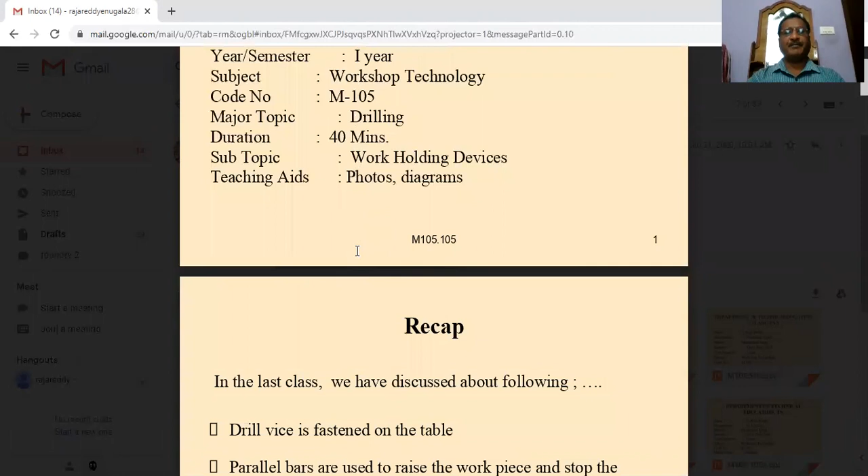Recap. In the last class, we discussed the following: the drill vise is fastened on the table. Parallel bars are used to raise the workpiece and stop damaging the vise and machine table. Step blocks are used to support the other end of the clamps.

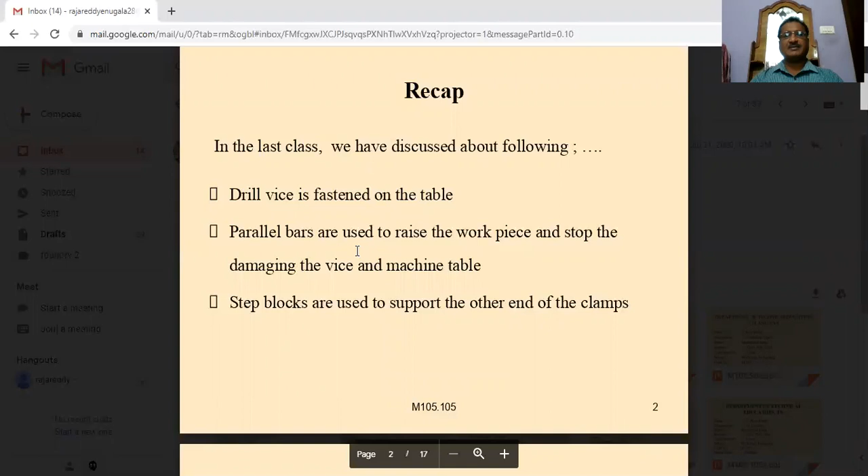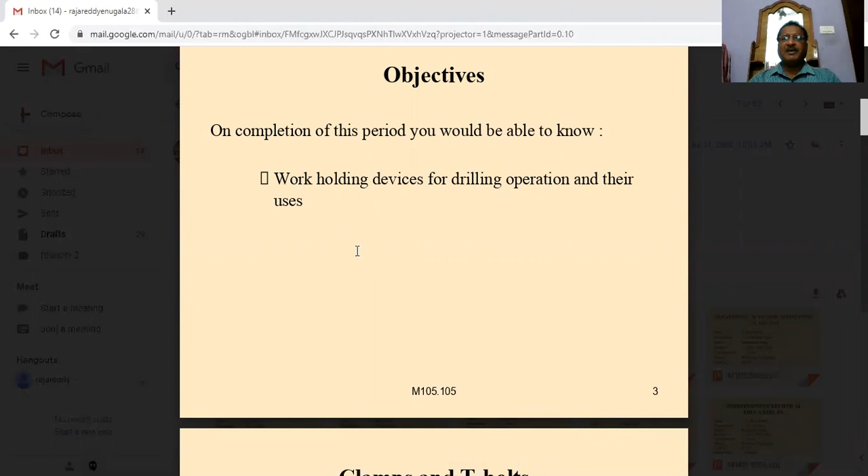Objectives. On completion of this period, you would be able to know the work holding devices for drilling operations and their uses.

Clamps and T-bolts are used to clamp the work to the table and avoid inaccuracy of work and accidents. It should be arranged to grip near the drilling point. The free end of each clamp should be clamped.

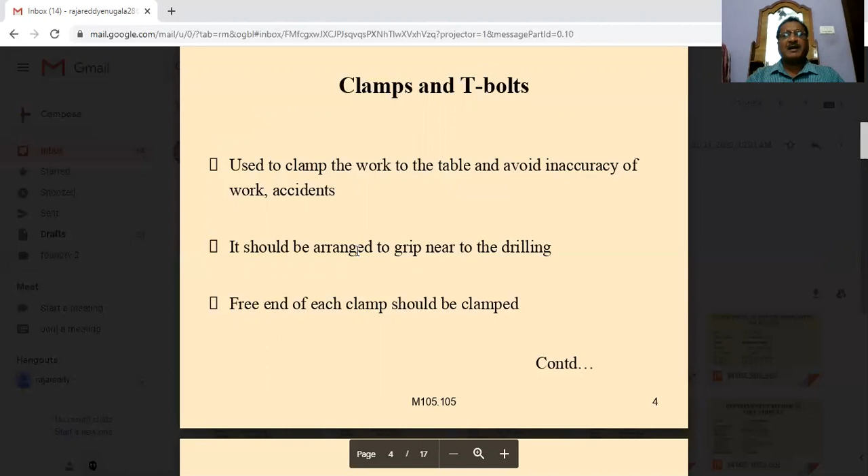Clamps and T-bolts. This schematic diagram represents clamps and T-bolts, which is one of the work holding devices. The machine table has slots, and in those slots, we could insert the T-bolts over the drilling machine table. The step blocks are placed as shown in the figure.

The work will be placed in the exact position over the parallel bars, and over the step and the work, a clamp is placed by inserting the hole on the clamp to the bolts on either side, and with the help of the nut, by placing a washer and nut, the bolt will be fixed.

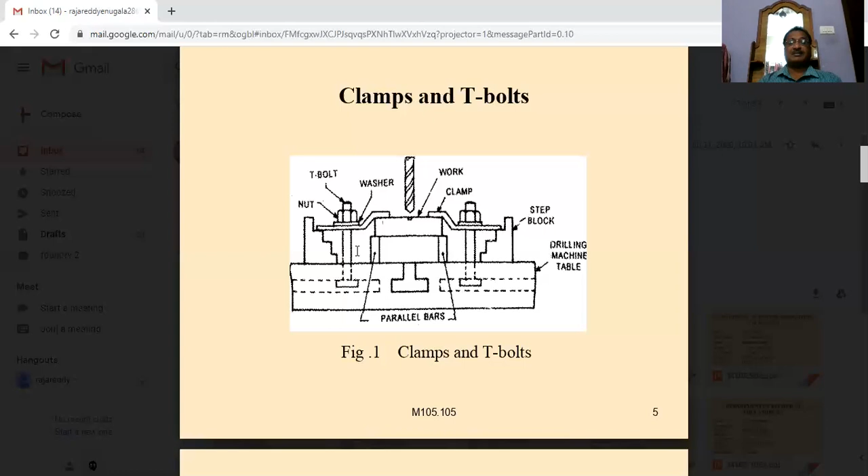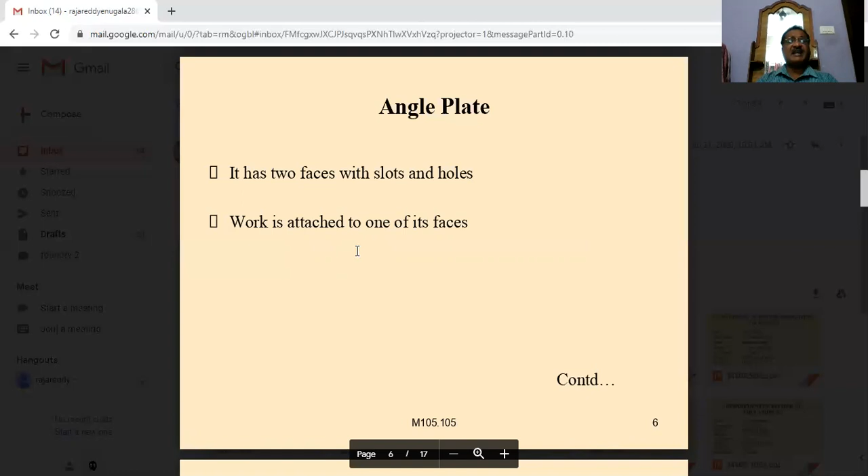Next is the angle plate. It has two faces with slots and holes. Work is attached to one of its faces. This schematic diagram represents the angle plate, which is exactly a right angle with a central hole.

The rectangular workpiece will be placed on one of the rectangular faces, at the center hole, inserting the bolt and nut. It is fit tightly, keeping the workpiece where the hole is to be made underneath the drill bit, at the marked and spotted area.

The drill bit is then placed over the mark and drilling is done. The drill comes out the other end of the workpiece without disturbing other components. Hence, this angle plate is used to clamp asymmetrical workpieces.

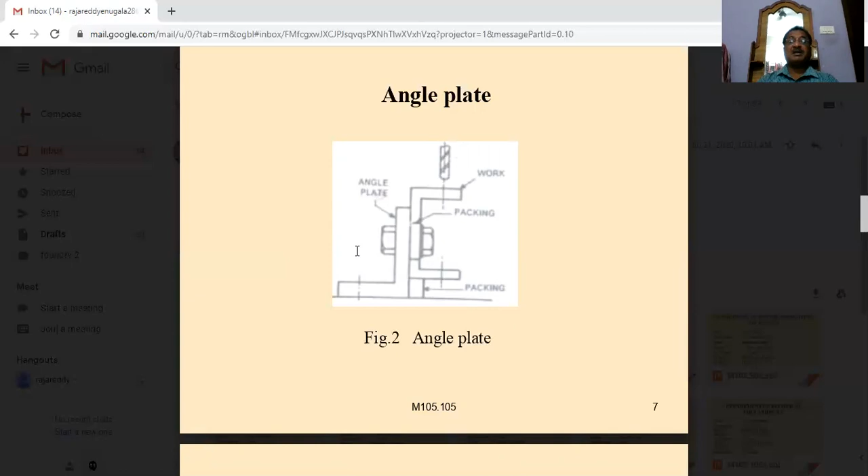This round bar normally cannot be held rigidly in the vise. The vise can hold workpieces that are flat, rectangular or square in cross-section, but not round. Round bars can be held rigidly by using V-blocks, U-clamps and bolts.

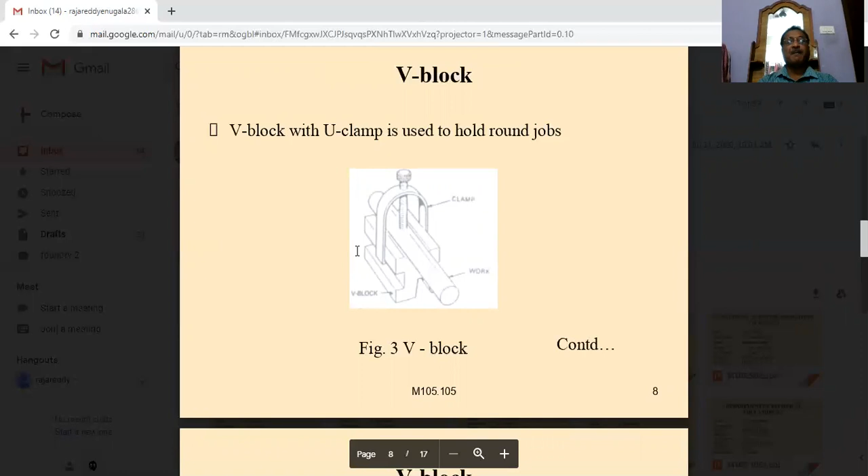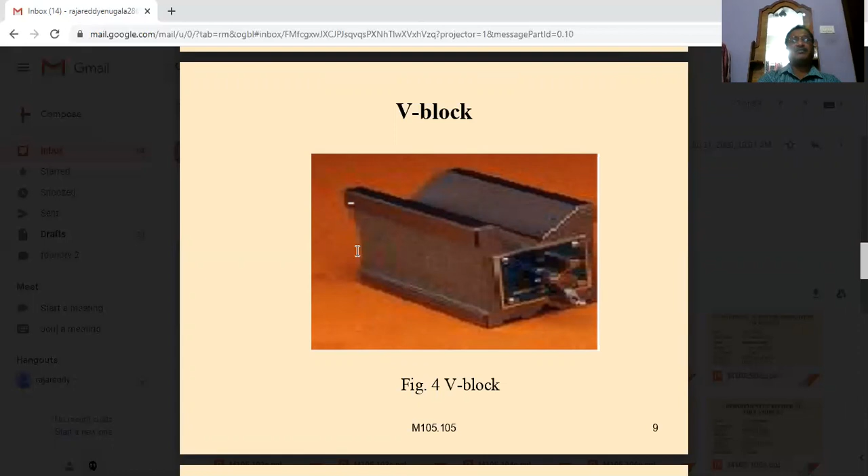The schematic diagram of the V-block is shown in the figure. This is the V-block. So the V-shaped portion is there. On that V-shaped portion, you have to lay out the round objects, and with the help of U-clamps, fit it rigidly to the V-block.

Next one is the drill jig. It locates and holds the work in proper position by means of the drill jig. It guides the drill to get the holes in the same exact location on all the parts. This will be used for mass production.

Jigs and fixtures will be used. Why jigs and fixtures will be used? Jigs and fixtures will be used for precision work in mass production.

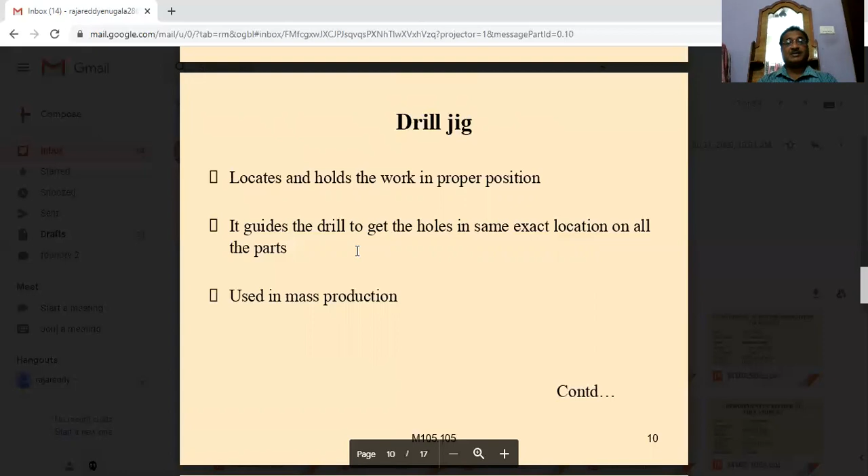What is the function of the jig? It holds and locates the workpiece in proper position and guides the drill to get the exact location on the parts. For that purpose, we have to use the jigs, the drill jig.

A drill jig is shown in the figure you see. This is the drill jig. It has eye bolts. This is the workpiece, and the swinging jig plate, and hand knob. These are the components of the drill jig.

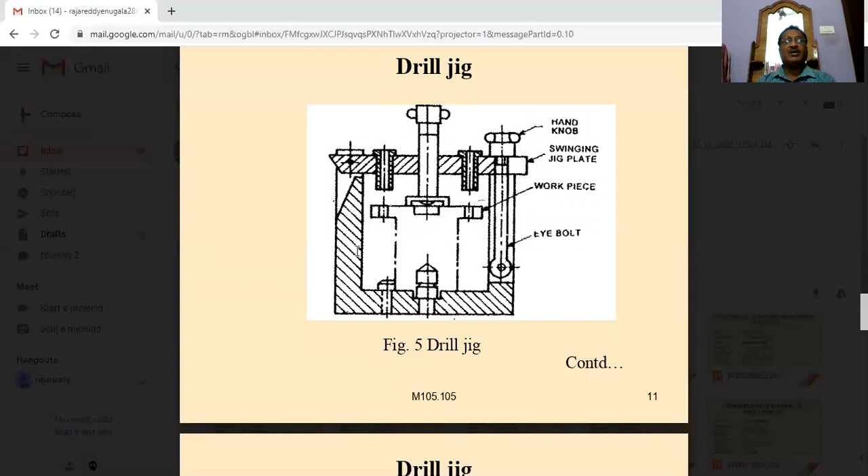The workpiece will be placed as shown in the figure. The drill bit will be placed at the central portion of the swinging jig plate. The drill bit will become exact, and it will hold, locate and give the position such that it will drill an exact, correct hole at the center of the located point on the workpiece. Hence it is the drill jig.

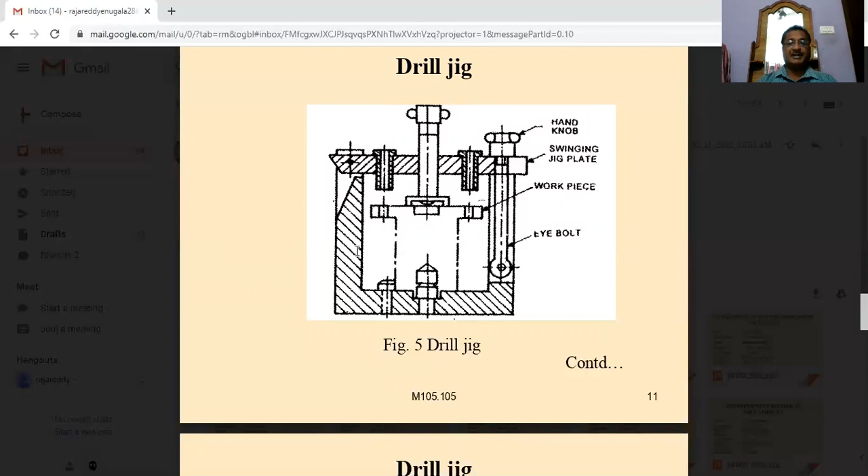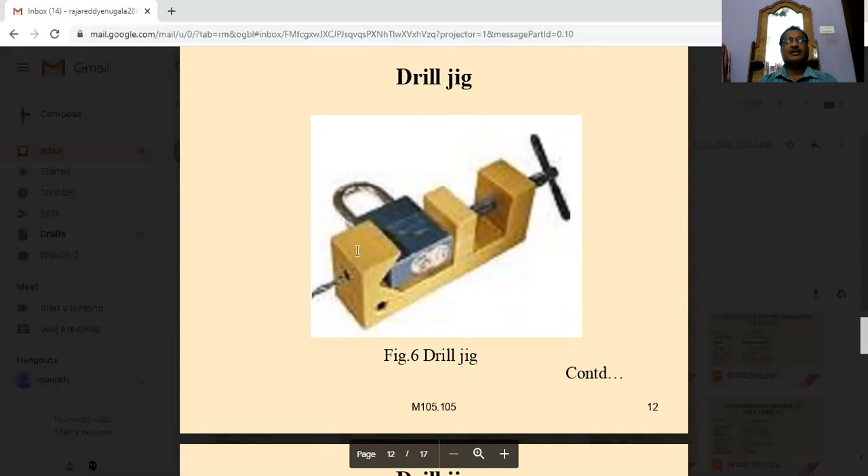A drill jig. You see, this is the drill jig. The figure shows the drill jig. This is the drill jig. It holds, locates and positions the exact point on the workpiece where the drill is to be made. The made drill hole will be exact.

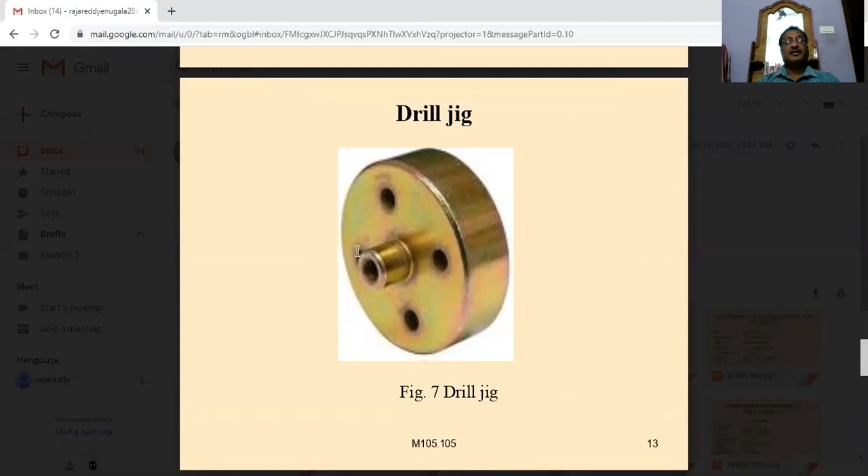Summary regarding these chapters: In this class, we have learnt angle plates has two faces with slots and holes. V blocks are used to hold round jobs with U clamps. Clamps and T-bolts are used to hold the work to the table. Drill jigs are used to locate and hold the work properly.